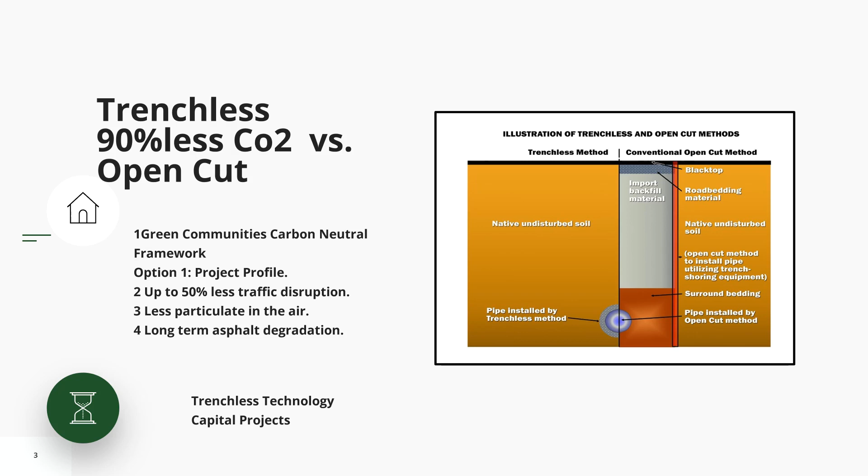Today we're going to talk about both rehabilitation and new construction methodologies available through trenchless technologies. I'm going to look first at rehabilitation, because that's mostly what we think about when we look at trenchless technologies.

When we talk about pipe rehabilitation, we've got to step back a second and look at the definition of what a pipe is. What is it there for? What does it do? Well, first of all, it's a vessel to contain a liquid or a gas.

The functionality of that pipe to contain the liquid depends on the liquid that's in it. If it's a storm sewer, it doesn't have to function that well. Obviously, if it's petroleum or natural gas, it has to perform 100% and totally contain the liquid. If it's water, surprisingly, we have allowable waste or allowable leakages in water pipes. But sad to say, a lot of leaks from water pipes are becoming more and more, and some cities are losing 30, 40, 50% of their treated water out through leaking water pipes.

The next issue is its ability to transport that liquid. Is it big enough, in other words? As we densify our neighborhoods, the pipes that we put in 50, 70, 100 years ago are now too small. Therefore, we have to upsize those pipes to make them big enough to transport the liquids now being demanded of them due to the densification of areas.

The last one is the structure of the pipe. It has to maintain a tunnel. If that pipe starts to fail—this is more relevant in culverts than smaller pipes, but smaller pipes do collapse as well—is the structure good? The reason I'm breaking it down this way is that the rehabilitation we're talking about in Trenchless is able to handle any one of these issues, and therefore bring life back into that pipe and give us back 70 or 100 years of lifespan again.

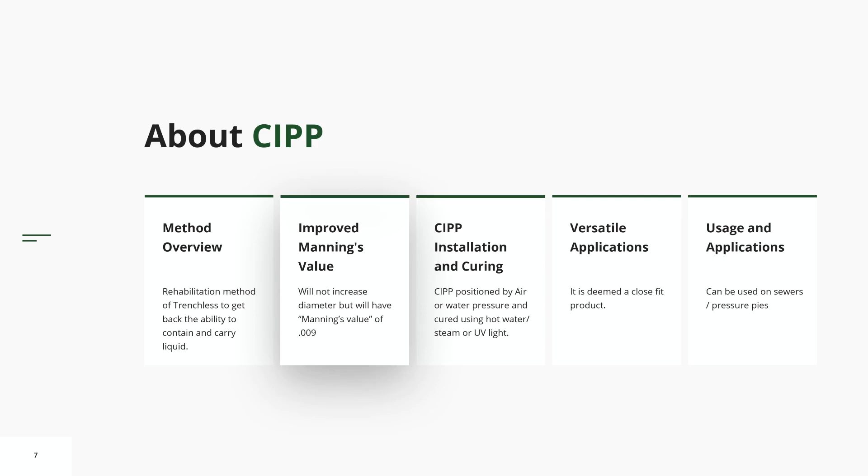Here is what we're doing—we're doing a wetting out process. We've got a roll of felt that is pre-manufactured. It is the diameter required for the particular job, so it might be 200 millimeters, 600 millimeters. In this case here, I would guess it's about 900 millimeters.

We induce a vacuum into that felt with a vacuum pump to create a vacuum. So that felt liner is in a tube, and it's got a coating or a wrap of plastic, like saran wrap type plastic, on the outside of it, so it's sealed. Then by introducing a vacuum on the inside, we've sucked all the air out, and just downstream of that, we introduce resin.

The resin goes into that vacuum and essentially saturates the felt. Or you can use fiberglass, or you can use Kevlar—there's lots of different products you can use to give structural strength. So the resin is introduced, and again, the resin is designed depending on what the product is—if it's sewage, gas, or a chemical you're trying to transport through this pipe, you can change the resins accordingly.

That roller, because you know the strength of the resin you're introducing and the thickness of the felt, what you're doing with that roller is setting the final thickness of the pipe. So if the design comes back and says you need a 25 millimeter pipe, you'd set those rollers at say 53, 55 millimeters apart, which gives you your double 25 by 2 plus 2 or 3 millimeters for safety.

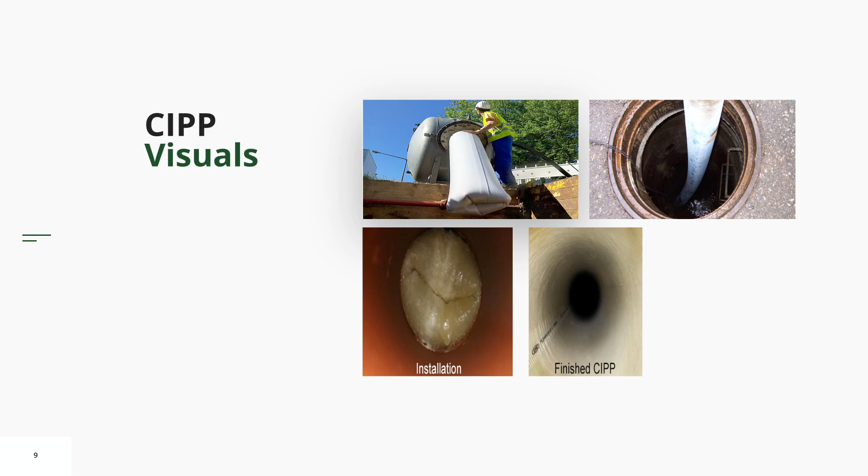Here is your typical finished product, just doing a cross-section through it. So the pipe on the outside in white is the existing PVC pipe, and then you've got your CIPP pipe on the inside. Again, you see that joint of the plastic on the right-hand side here at about 5 o'clock, that little white line going through there. That's the plastic on the inside again.

So here's your typical resin or CIPP pipe and a CIPP pipe totally rehabilitated.

Here's another product, this is a spray-on. So the CIPP pipe we talked about a few minutes ago can be designed either as a standalone, or as a composite product. In other words, if you're looking at a pipe, say 600 millimeters or 900 millimeters, you don't really want to put a CIPP pipe in there that is so thick that it displaces the existing pipe completely. There's no need for that, unless the existing pipe is totally gone.

What you would do is put in a composite product so that your CIPP will augment the strength of the existing pipe, or if it was just a case that the existing pipe was leaking, you put in the CIPP pipe to stop the leaks, but you're depending on the existing pipe for the structure. In this case here, there is really no structure from this product.

It is a polyurea that you're putting in here, a coating that is going on. It does have the ability to span holes and span leaks in the pipe. And what it's doing is providing the ability for the pipe to now hold water again.

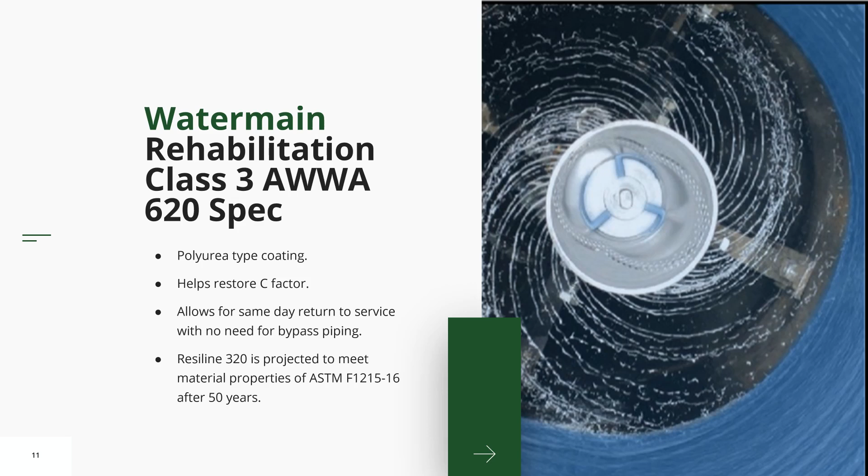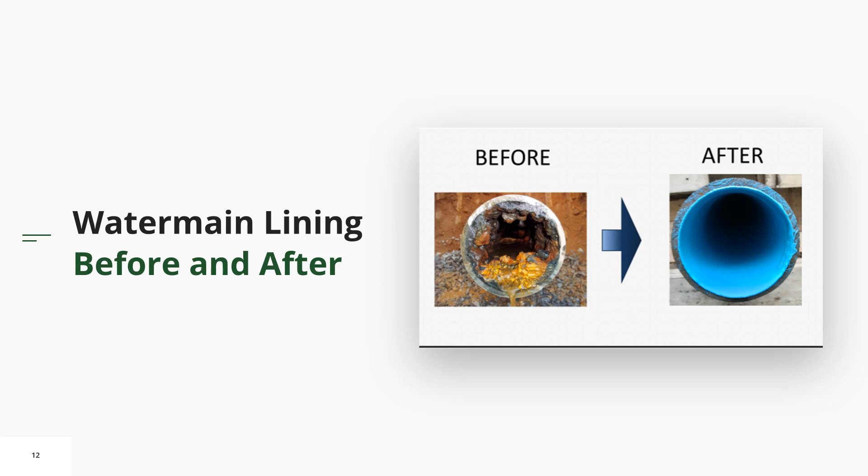On the right hand side, you've cleaned the pipe and then put the polyurea on the inside. So that's the pipe on the right hand side. You can see the increase in capacity and the longevity, and you've sealed any holes that are in the pipe. Now out of water pipes, down into a corrugated steel structure culvert.

So we're talking now about a much bigger pipe. This was a pipe in the city of Richmond, just under Highway 99, which becomes the I-5 in the US. This pipe had failed on the right-hand side, and this is what's called an exit control culvert, which means there is standing water in the pipe all the time.

Therefore, the invert of the pipe in this case is probably in pristine condition. The overt of the pipe, as you can see at the top of the photograph, is in great shape. So it's just at that band area on the sides, typically 8 and 4 or 9 and 3, that has failed. In this case, within 150 to 200 millimeters above and below that failure band, the pipe was a full 6 millimeters in thickness. But at that band, it had failed the whole way along.

I'm not sure exactly why. It's probably to do with water and oxygen levels.

Here is an entrance control culvert. An entrance control culvert is one where the water goes through and doesn't remain standing in the pipe. It just flows right through, and you tend to get bed loads and rocks. Exit control culverts tend to be flat and sloped, whereas entrance control culverts tend to be steep. Entrance control culverts tend to have bed loads, rocks and gravels coming through them, which corrode the invert through abrasion. Here you can see the abrasion happening, and then it goes through.

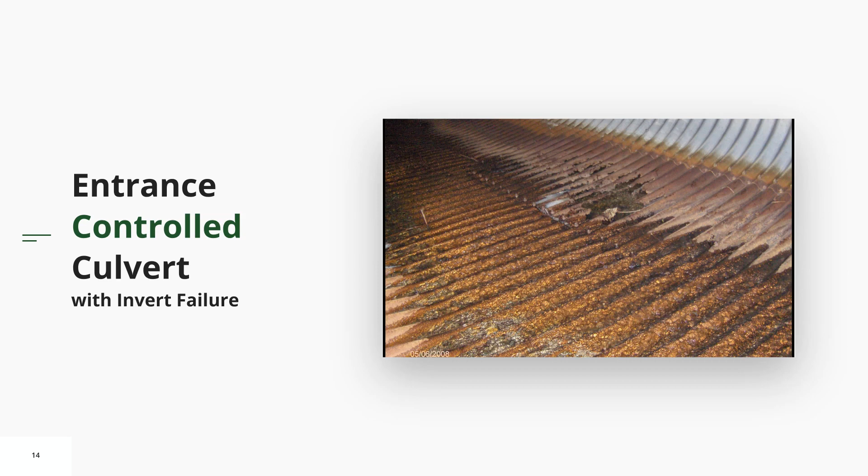Here is a product that is great for rehabilitating these pipes. It's a sprayed-on, centrifugally applied product. Whether you're putting on a geopolymer or a cementitious product, it doesn't matter what the product is - that's a design issue. It's the application that matters here, and this is put on with a spinning head, either electrically or air-powered.

Here's a more conventional approach. This is when the pipe has failed, generally down at the 8 and 4 or 9 and 3 position. So what we're doing is bonding to the existing pipe, making a composite product. The bottom becomes a continuous concrete pipe without joints, bonded to the steel. Then the steel on the overt, or roof of the pipe, being in perfect condition, is reutilized to continue providing service for a further 70 or 80 years.

This is a key part of rehabilitation. We're using the existing structure, the parts that are still in good shape, and augmenting that existing structure with the part that has failed, building a new section to replace the failed part.

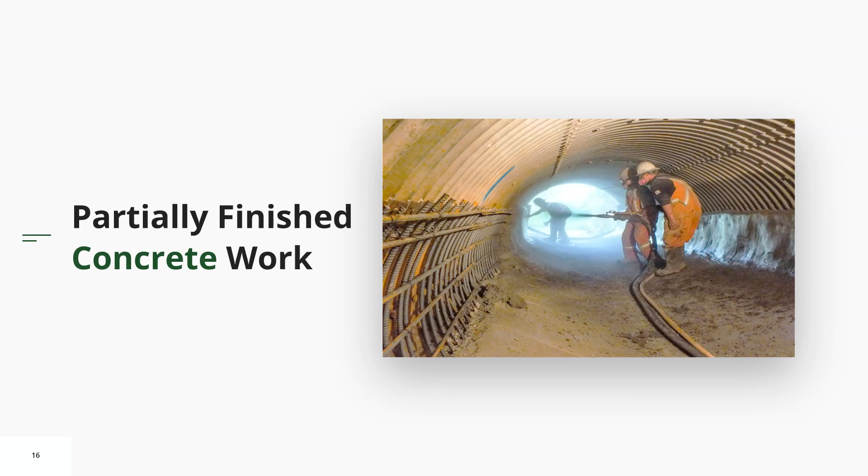In this case, we're concreting the floor and shotcreting the walls. All of those previous products I talked about were what we call closed fit liners. They were very close to the edge. They maybe augmented the flows a little because of the N value or C value, but they didn't make it bigger. They made it the same size or as close to the same size as possible.

Now we talk about slip lining or loose fit liners, or internal rehabilitation. It can be used again in pressure pipes or sewer pipes. You do lose diameter, that's one of the issues here. What you're doing is putting a pipe inside a pipe, so you've got an annulus between the new pipe and the old pipe.

That annulus generally has to be grouted. Doesn't always - in water mains you don't have to grout. The Europeans don't tend to grout, North Americans do. So there's different opinions as to whether to grout or not.

Pipes can be introduced by various methods. It can be pull-in whole, or folded down or collapsed in some way.

The other big issue here is that this pipe we're putting in is made by others. So it takes part of the responsibility from the engineer of record away, because all of the other processes we talked about - whether the concrete, the CIPP, the resins - were all made, or the process happened, in the pipe on site, which meant you were both rehabilitating the work and creating the product on site. From now on, with slip lining, the product you're doing the work with is made by others, controlled inside the factory, not on site.

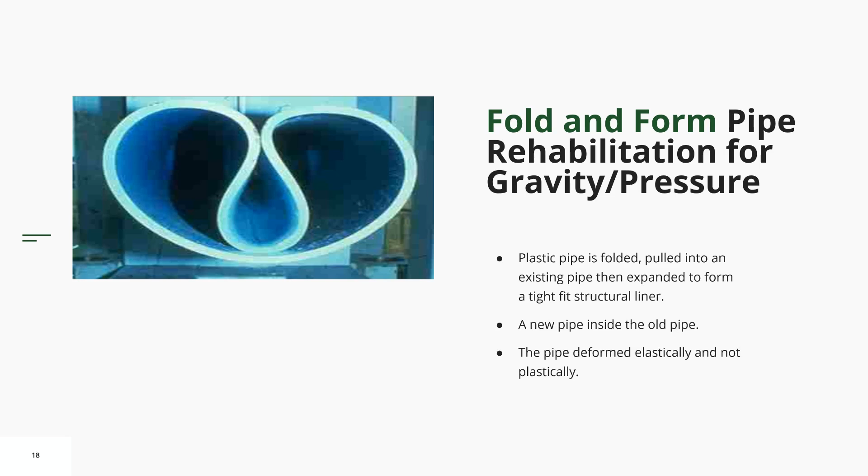So if you remember way back to my carbon slide, I talked about that pipe way down in the ground, 2.5 meters down. What we're doing is just rehabilitating that pipe inside. So all of the other material I had to excavate, at 2.5 meters deep by 1.5 meters wide, with all these rehabilitation methodologies we're eliminating that action - eliminating hauling all that material away. All we're doing is working within the existing pipe.

There is another process you can do where you can swage line. You can actually pull high-density polyethylene, because it has a great ability to elastically deform before it yields. So you can elastically deform the pipe, stretch it out in other words, taking the diameter down by 10, 15, 20%, pull it into the host pipe, and then let it spring back, if you like. Now, it doesn't spring back as such.

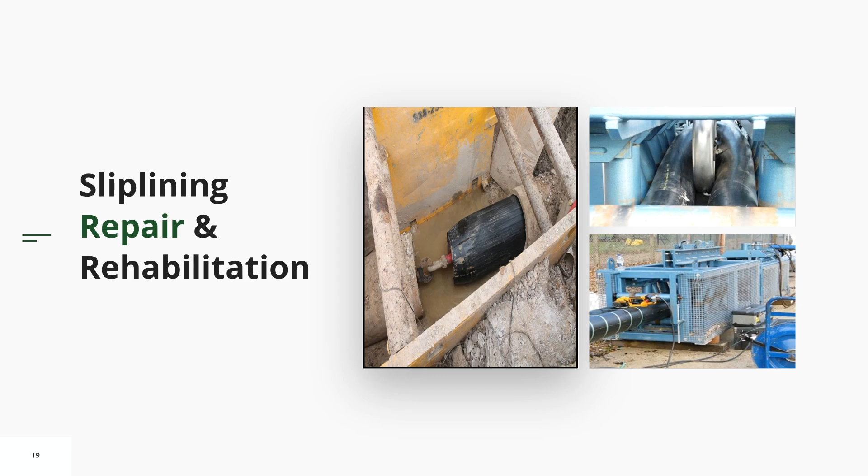Here's another product, this one called Primus Line. It's a product out of Germany, and it came from the oil and gas industry, because the oil and gas industry is famous for having to put water down into oil wells to push the oil back up again.

A lot of these pipes would have been steel pipes, used for 10 or 15 years, in the North Sea, in the Gulf of Mexico. It wasn't a big concern at first that there were steel pipes and coatings on them. Then they found they were using the pipes longer and longer, and they were starting to get failures and corrosion. So they were looking for ways of rehabilitating it. This was one of the ways.

The other option was swage lining, using high-density polyethylene liners. Again, the steel pipe was failing due to corrosion, pitting, and pinholes. Structurally it was fine, but it couldn't contain the liquid anymore. So what you had to do was augment its ability to contain a liquid.

Here was one solution, a Primus Line pipe. The blue on the outside is a sacrificial layer, so that when you're pulling it through the steel, that blue will scratch and be scratched to save the other coatings underneath. The beige material is actually Kevlar, which gives it its strength and hoop strength, and the black inside is the product that actually contains the liquid.

So going back to our first premise, the first issue was the vessel to contain the liquid - the black handles that. The beige is the third area, which contains the pressure. And the size, the diameter, is the capacity, which is issue two.

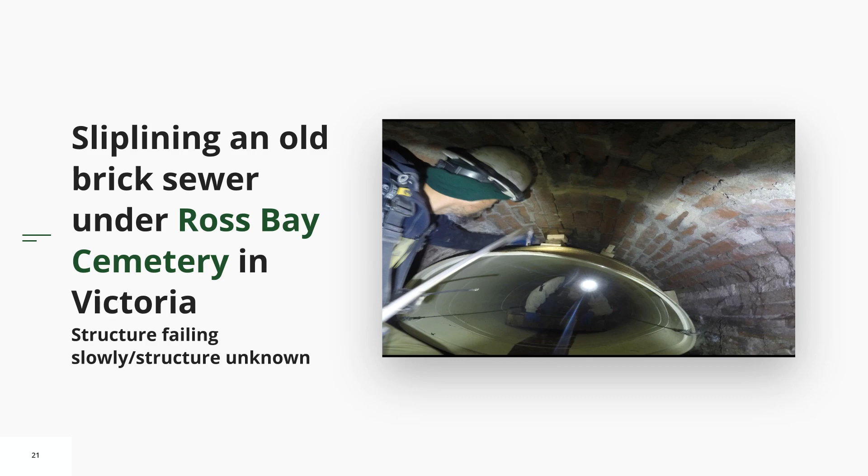Here is another pipe. The previous one I talked about had an invert that was abrading away. This one is a wood stave pipe, located in North Vancouver.

So what we ended up doing is slip lining, again with a GRP product, and stabilizing that ovality by grouting it, creating the structure that way.

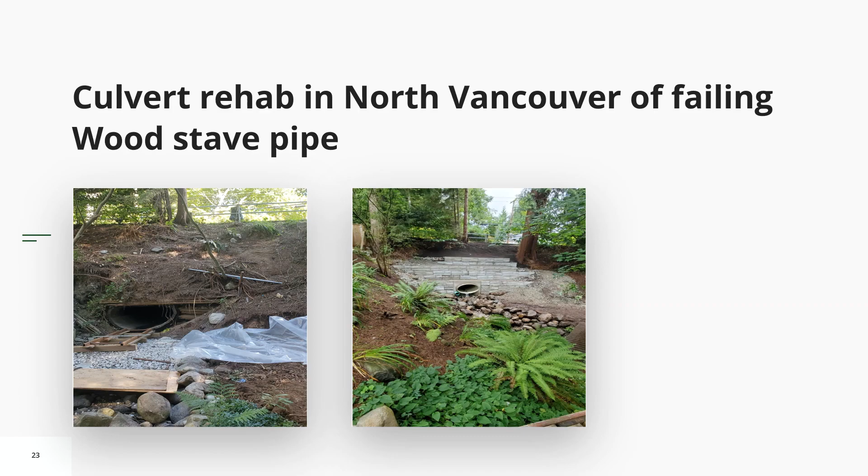Here is a case of a live flow slip line. In the early 70s, late 60s in British Columbia, a lot of sewers were installed to pick up what would have been local sewer systems that drained areas and went out into rivers or oceans.

The major governments at the time deemed that they pick up all of these sewer lines, capture them, and take them into major treatment plants. A lot of these pipes were put in during the 50s, 60s, 70s, and are now coming to the end of their lives, or there are other issues happening too.

A lot of hydrogen sulfide. Because they were big pipes—1.5 meter, 2 meter pipes, 3 meter box culverts—they were concrete, of course.

We now know that concrete has issues with hydrogen sulfide. The hydrogen sulfide tends to eat the concrete, and we get failure of the pipe and corrosion, especially when there's a gap between the top of the sewage and the overt of the pipe, producing the gas. So we get failures in these pipes.

When you go in to rehabilitate an existing sewer line, we can't get 300,000 people to stop using the bathroom for 3 or 4 days. So we have to either bypass or work in the live flows. Bypassing a sewer system is a very, very expensive and very high risk problem.

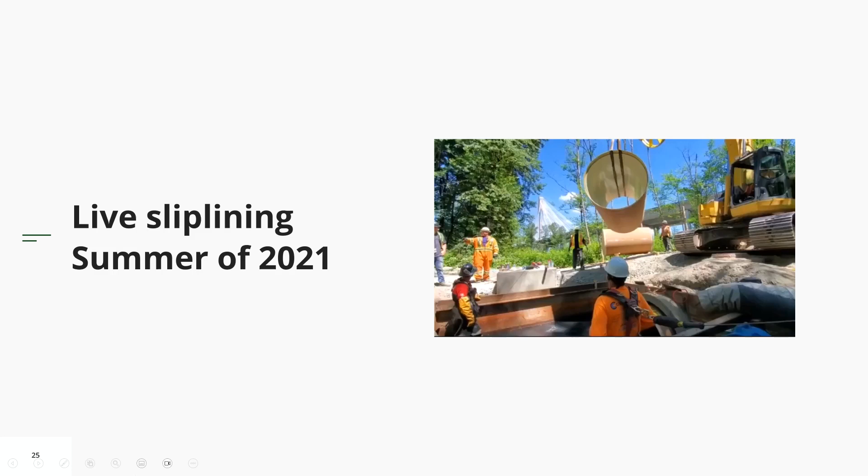Here is a case of slip lining a corrugated steel pipe in Delta. This corrugated steel pipe has failed. Rather than putting in a pipe or rehabilitation with sprayed-on concrete like we did earlier, we're putting in a whole corrugated steel pipe and grouting the annulus.

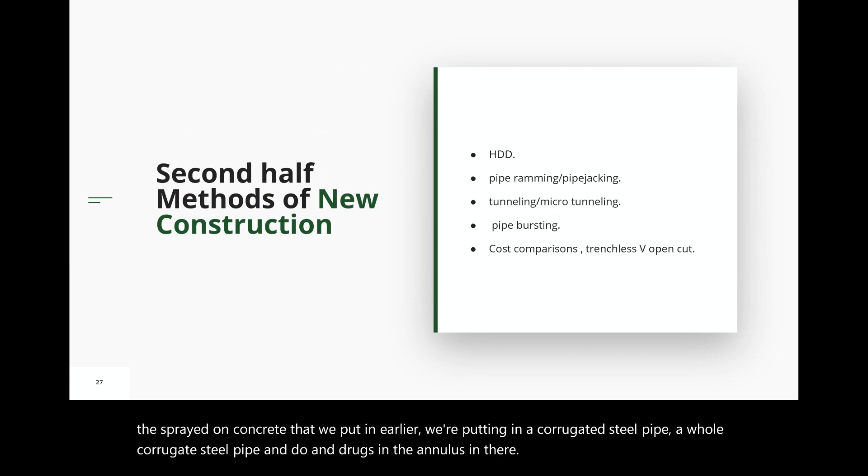Okay, we're going to move on to the second half. The second half is new construction. Rather than the rehabilitation we just dealt with, we're going to deal with new construction, covering the following topics, which I'll get into in detail in a second.

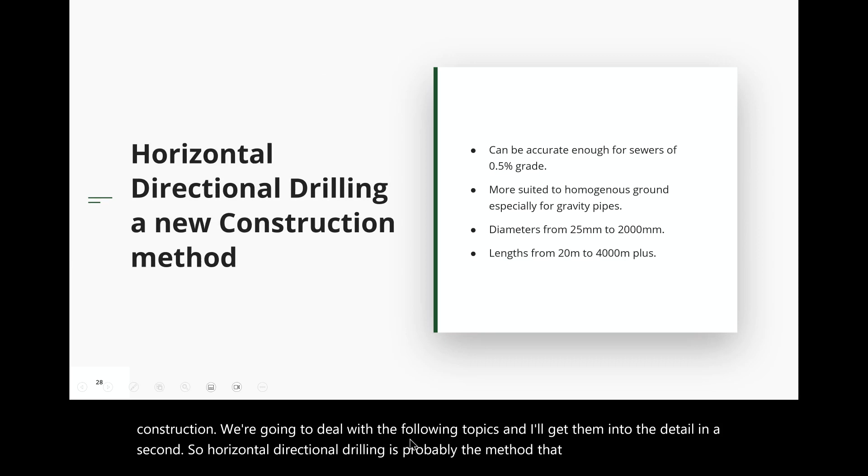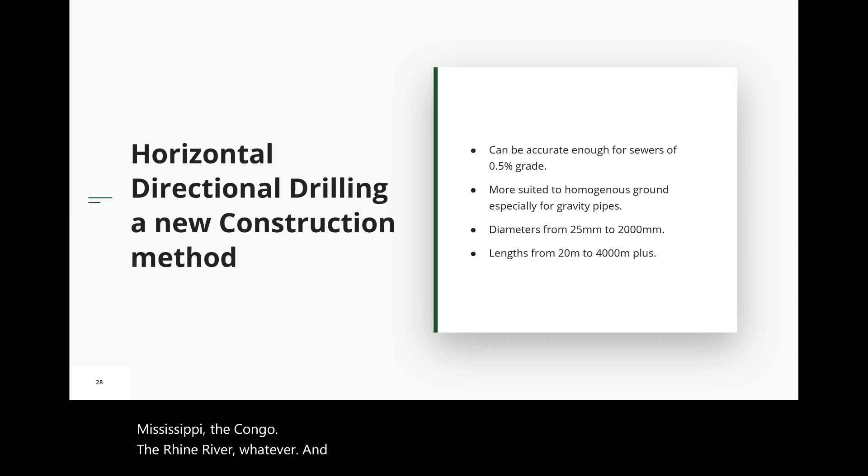Horizontal directional drilling is probably the method we most know about when we talk about new construction. We've seen it used for everything from a 25 millimeter water service or fiber optic cable into your house, to installing 600, 800 millimeter pipe across the Fraser River, Mississippi, the Congo, Rhine River, whatever. It's a process used for installing a pipe that is generally not a gravity pipe - it can be used for gravity if you have very tight grade controls, but it's generally for pressure pipe situations, with lengths up to 4, 5, 6 kilometers depending on what you want to do.

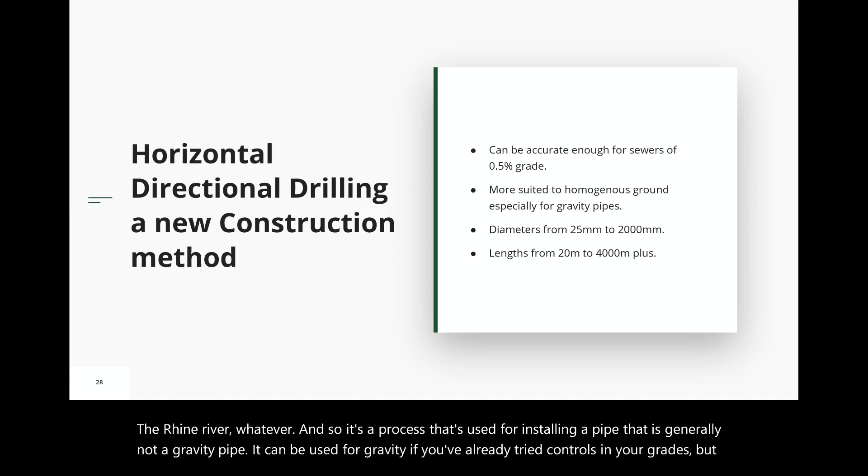This is the process: you are drilling in with a drill rod, and depending on the size of the rig you're using, the drill rod might be anywhere from 25 millimeters in diameter up to 200 millimeters in diameter, similar to the drill rod used in oil well drilling.

Horizontal directional drilling actually came from the oil fields. The rig would go down into the zone where the drill pipe is, then go off laterally to try to reach a reservoir of oil that could be half a mile or a mile or two away - it wouldn't have paid to locate a rig directly over that deposit, but it did pay to drill horizontally from one base. This was particularly common in the North Sea, where you weren't dealing with a rig on dry land but out in the ocean, and relocating a rig there is very costly. So they used this process to capture pockets of oil around where a rig was located.

So then we've used it - it's come into the municipal and utility side. I believe Cherrington was one of the first to get into this in California back in the 60s.

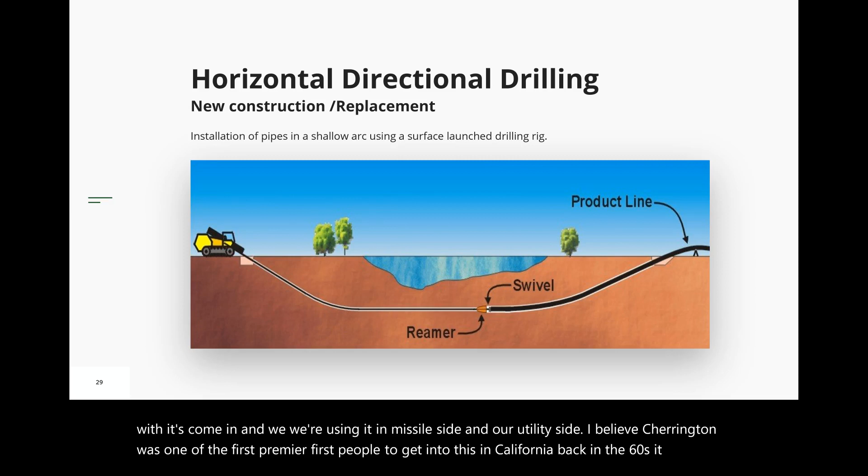It is a process where you're drilling down. As you go straight, you're rotating the rods at, let's say, 40 to 50 RPM. When you want to stop and change direction, you stop the rod in the 12 o'clock position and push straight - that will cause the rod to go up, or in the case of changing from an incline, to go flat. The front of the rod has either a flat plate on it if it's soft material, or a tricone bit on the front if it's rock.

That plate or tricone bit is bent from the direction of the rod by 5, 6, or 7 degrees. Inside that first section, about a meter and a half behind the tricone bit or flat plate, is a sonde which sends information back up to the operator of the rig - rotation, so they know if it's at 12 o'clock, 3 o'clock, or 6 o'clock, inclination to know how inclined the head is, depth, and other parameters such as temperatures of the drill rig and the head. That's how they control it.

So they can either walk over it, or put a wire grid on there - depending on the size and the process, they can control where the rod is, what its inclination is, what its rotation is, and from that steer the rod into the perfect condition. When you're doing this process, it's akin to drilling a piece of steel.

You start off with your pilot hole, and then you verify the pilot hole is exactly where you want it to be. Then you put on what they call a reamer, or if you're drilling a piece of steel, you use bigger and bigger bits. So you ream the hole out.

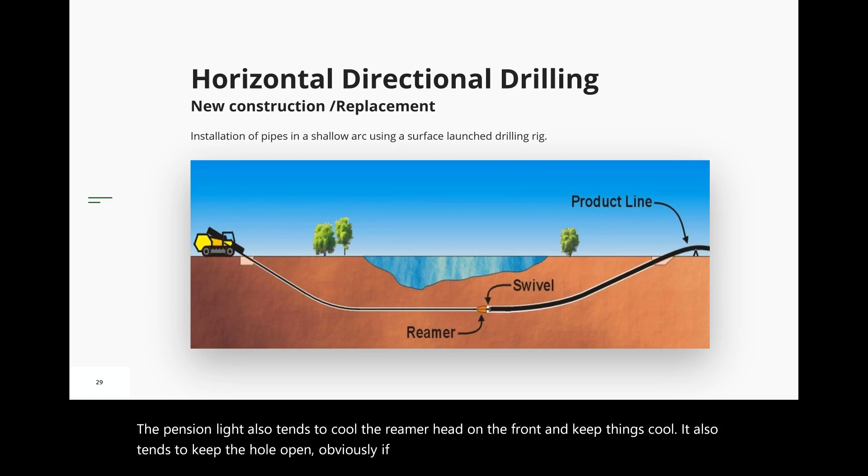What you're doing is balancing the weight of the bentonite with the tendency for the hole to collapse. So you make the bentonite as thick as you need to counteract the tendency for the clays or sands, or even sands and gravels, to try and collapse.

As you start to get into gravels, it becomes very difficult to counteract the ability of gravels to collapse, because of the point load of a piece of gravel — it will just sink through the bentonite.

So once we get into gravels, we end up having to put casing pipes in to get through the gravels and into the rock to drill through.

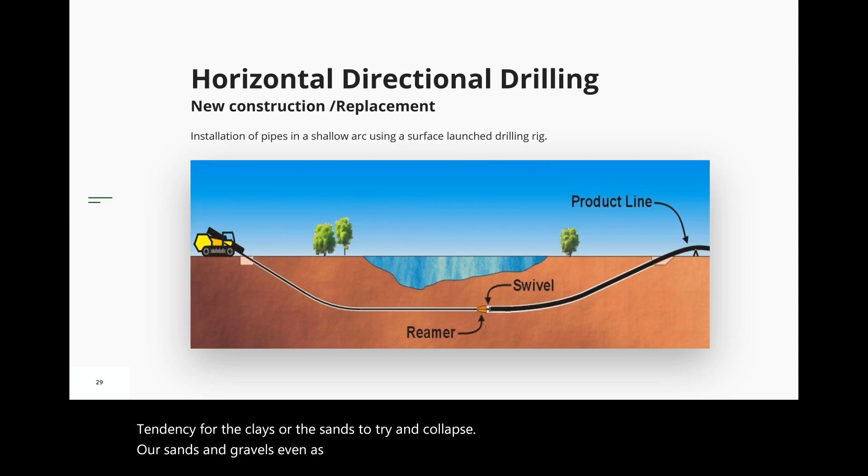But I don't want to get into too many details on that. I'm showing you this hole because of this path here, since it's important that we understand the process of directional drilling.

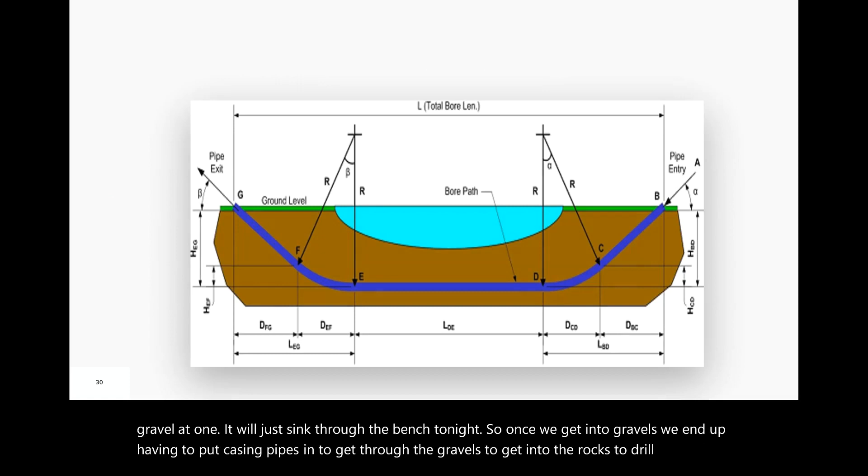In this case, I'm using this as a path for putting in, say, a pressure pipe like a water pipe or an oil pipeline, under a creek.

If, however, I was using directional drilling to create a gravity pipe, the only piece of pipe that's usable for gravity is really from E to D. The rest of the pipe is just put in as part of the process of getting there. But I need to do from G to E and from D to B — those two pieces need to happen.

If they don't happen, I can't install the pipe from E to D. Therefore, I need a lead-in area and a lead-out area. That's one of the issues with directional drilling, because it starts from the surface, goes down, gets on line and grade, you drill along on line and grade, then you start coming back out again.

If you think of the drill rod going through the soil, it's akin to a wire that's used for cutting cheese, right?

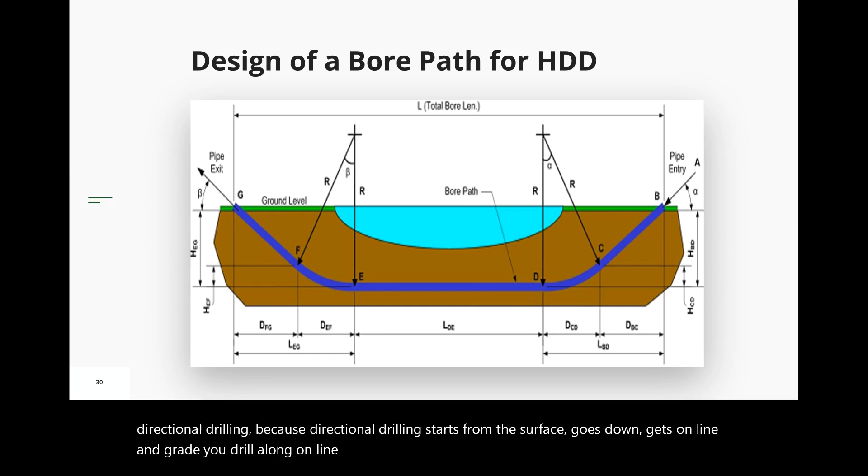As you pull that rod back and forth, the tendency is for E and D to start coming up through the ground, because the rod is under tension as it's being pulled either in or out.

So you end up having to move the E and D spots far enough away from the section you want to use, so you don't end up pulling up. That means you do have a long lead-in area and a long lead-out area at the end of a used section of pipe.

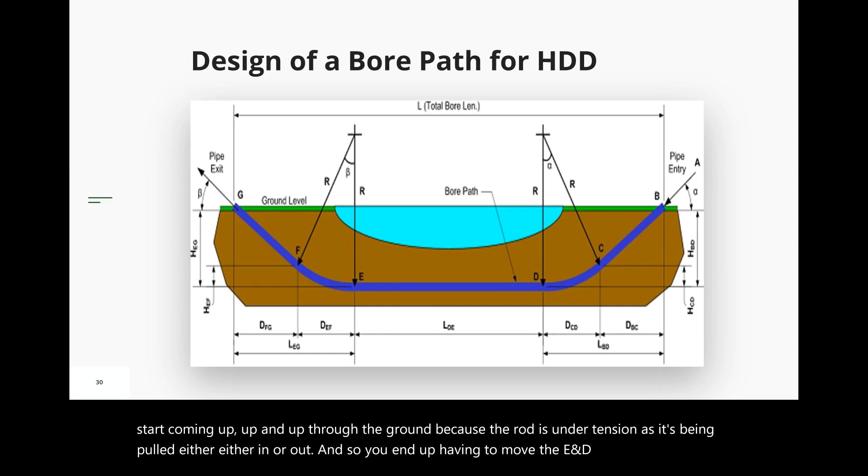I'm using this from Ditch Witch — their directional drill — to explain how the directional drilling system works. It'll go through exactly what I talked about a few seconds ago in the previous slides.

So you're establishing the bore path. It's very important that you know exactly what utilities are in the way, and you generally will pothole those depending on the risk of those utilities.

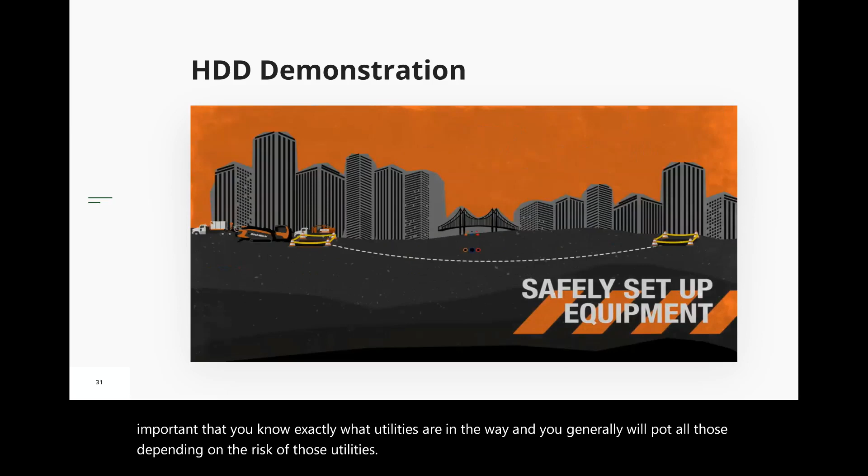So they're drilling. You can see the drill rod is rotating, and that steel plate is on the front of it. Now they're going under the existing utilities there. You see that machine there that they showed us, the sonde is sending up the signal. It's stopping at 12 o'clock. He's going to push straight, and then he pushed straight, and that caused him to go up again.

So he's going along. Here they're talking about the mixing fluids. So that's the mixing fluid coming out at the front. That's the bentonite. It is mixing with the material, and it's going back and bringing the cuttings back. So they're using vacuum excavation here to expose utilities. Here it's getting to the end.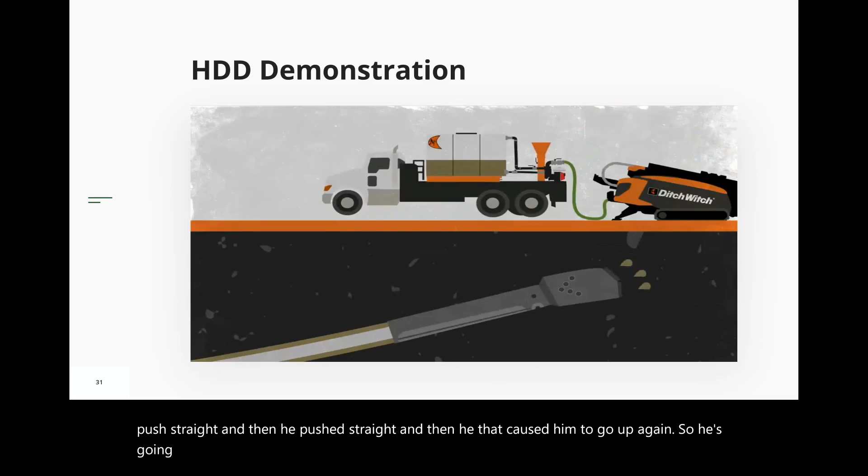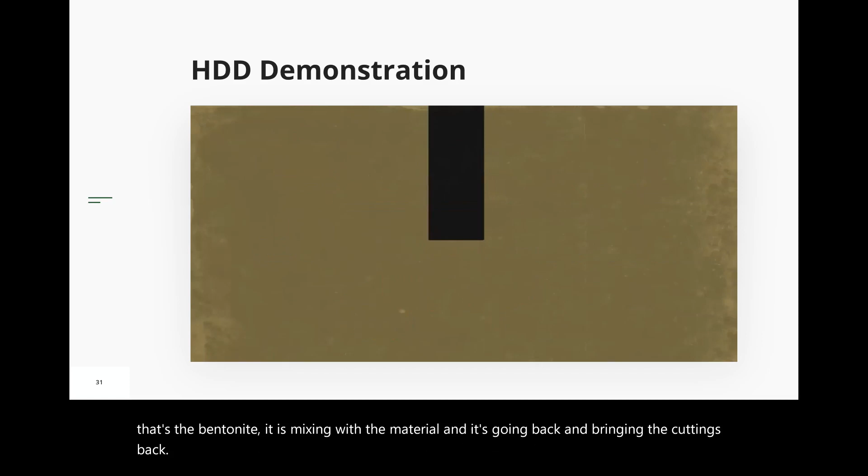So we've made the pilot hole in this case. Now what we're going to do is take off that drill piece on the end, and they're going to put a reamer on there. Here's your reamer going through, and it's increasing the size of the hole. Hopefully you'll increase it in steps and take it up to the final diameter that you need to do. Again, you're using bentonite in here to take the cuttings back.

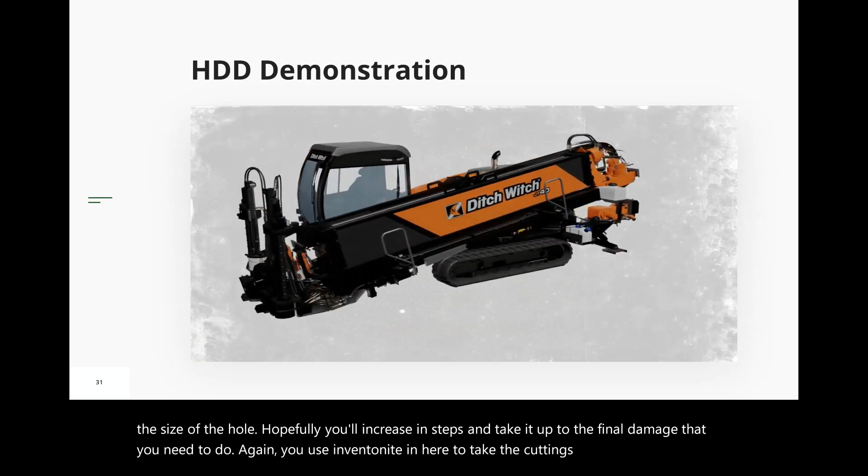Pipe ramming, pipe jacking, as we demonstrated in horizontal directional drilling, you need to lead in and lead out. Pipe ramming, pipe jacking, you start from a pit and you end in a pit. Or you may be pipe jacking, pipe ramming under a railway line or under a road which is built up on a flat plain area.

Diameters up to 300, from 300 millimeters to 3.5 meters, 4 meters. You're generally not going to get 300 millimeters. So one of the problems you get with pipe jacking, pipe ramming is that you may have to go into the pipe if there's something in the way, such as a rock or a tree, and obviously you can't get into a 300 millimeter pipe. The smallest you would get into would be maybe 450, but probably more 600 millimeter pipe. So therefore, pipe ramming, pipe jacking, you tend to put in at least a 600 millimeter pipe.

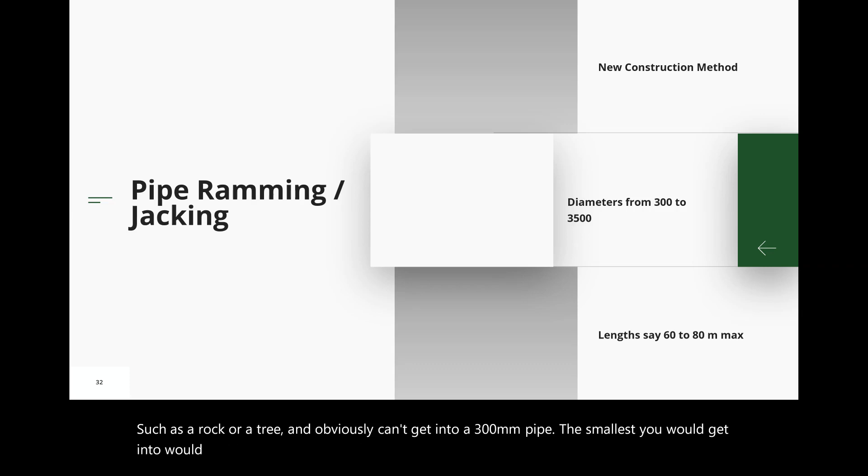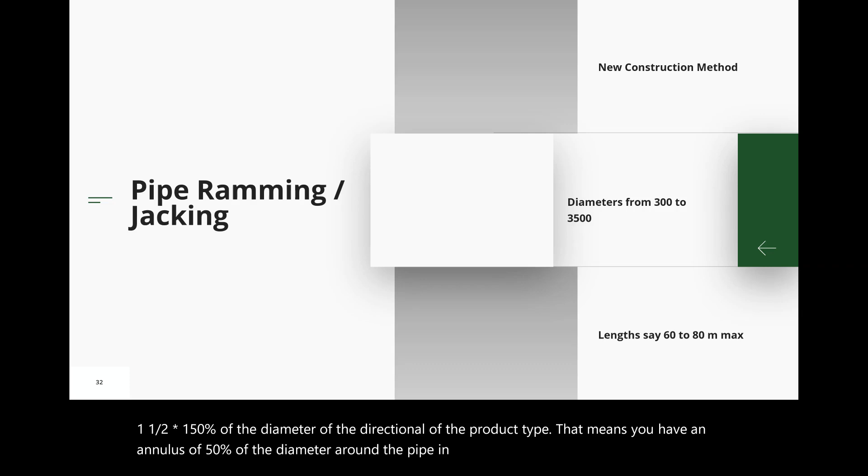When we talked about directional drilling a few seconds ago, we talked about making the hole 1.5 times, or 150%, of the diameter of the product pipe. That means you have an annulus of 50% of the diameter around the pipe. In all other methods of construction, you're only making a hole probably 25 to 30, 40 millimeters bigger than the outside diameter. That does tend to limit how far you can go, because your friction builds up depending on the soil, obviously, but 60, 80, 100, 120 meters, that's the limit. Whereas in directional drilling, you can go 4 or 5 kilometers if you need to.

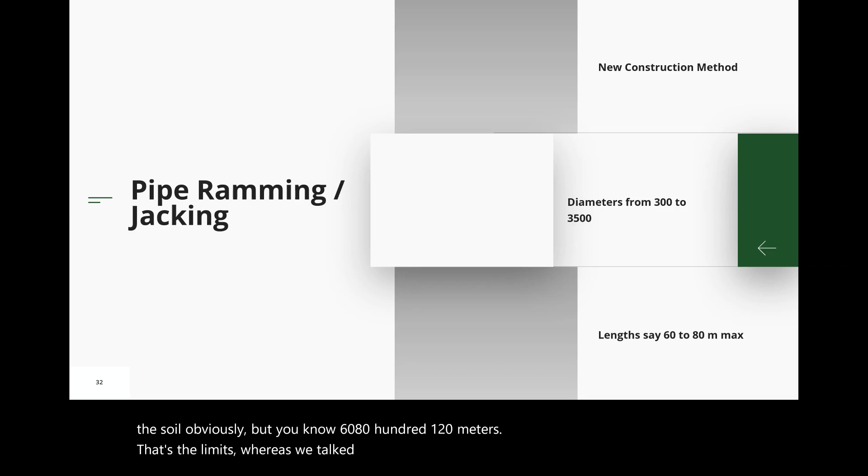Here's your pipe ramming. They have an air tool on the back, and they're hammering this casing through a road. You can see in this case they put a pit in here. Now by pipe ramming, I do not need a back wall because the energy I'm using to hammer the casing through, I'm essentially doing a horizontal pile driving.

That casing is being hammered into the ground, and it has a little bit of extra pipe welded on the front leading edge to make the annulus a bit bigger than the outside diameter of this. I will also introduce bentonite around that casing pipe to try and lower my friction, and also to keep the existing ground in place, and create a little zone of low friction area to allow my casing pipe to advance as far as possible. And as I ram in, of course, I'm building up weight on the inside because I'm encapsulating the material that was there in the ground originally inside the pipe.

I will get to the point where my weight has come up because of that material. So I may stop, take off the hammers, take the whole thing apart, go in, clean out the material that's inside the casing pipe, reattach the hammers, and start going again.

This is pipe jacking. Pipe jacking and micro tunneling are not that different. The only difference is the machine that's on the front end of this process. Pipe jacking would be an older process. You would have had people inside at the front end, tunneling by hand, just as they tunneled if you went way back to that brick sewer line we talked about in Victoria, where they did the tunneling by hand. In this case, they used to do tunneling by this as well. Now we tend to use a TBM, or a micro tunneling machine, or a tunnel boring machine of some kind.

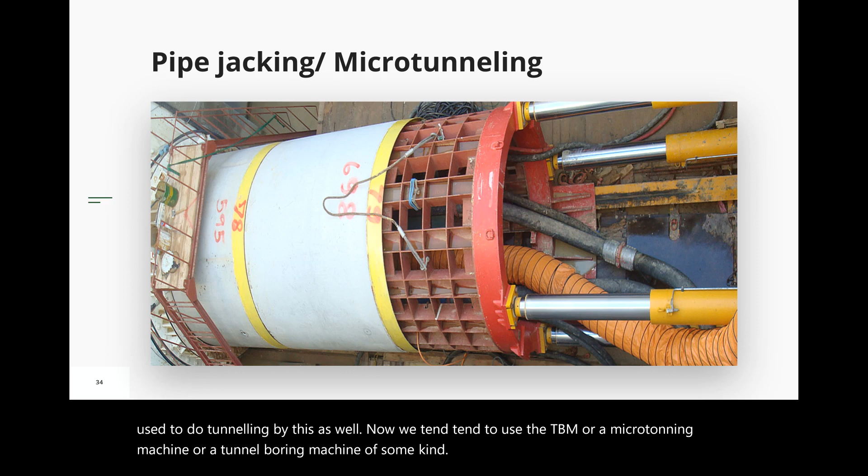In this case, we're pushing the pipe from the back. Because of that, the annulus is only 25 to 50 millimeters on the outside of those pipes. You do tend to limit out after 60, 80, 100 meters, so micro tunneling and pipe jacking are limited to those kinds of lengths before they start to slow down. Obviously, you can make the annulus a little bit bigger and continue on more, but it depends on the soil types and lots of other things.

Pipe ramming versus pipe jacking, why you'd use one against the other: with pipe jacking, I'm jacking against a back wall or a product, using 250, 300, 400, 500 tons, so I need a good back wall to push against. With pipe ramming I don't, because my energy is coming from a pneumatic tool. So they both have their benefits.

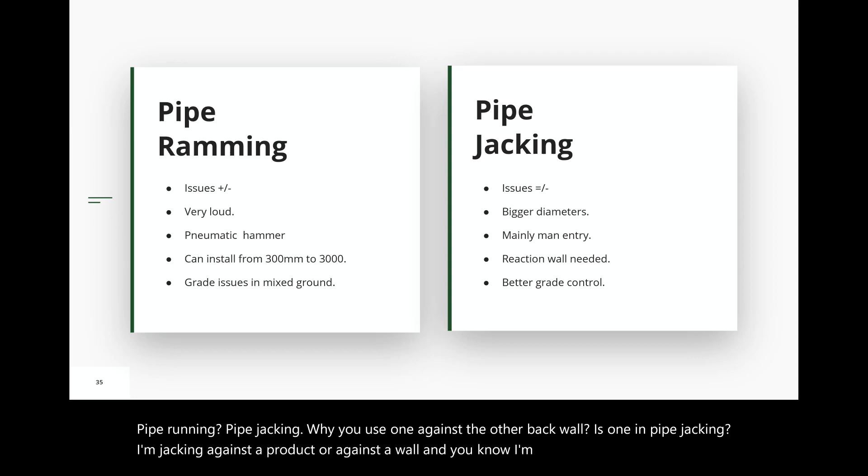A tunnel boring machine or a micro tunneling machine are very similar except for scale. You can see in the front, in the middle, three wheels - that's a tricone bit, the same type of bit we use in directional drilling, except there we just use that bit alone. This is set up to go through rock.

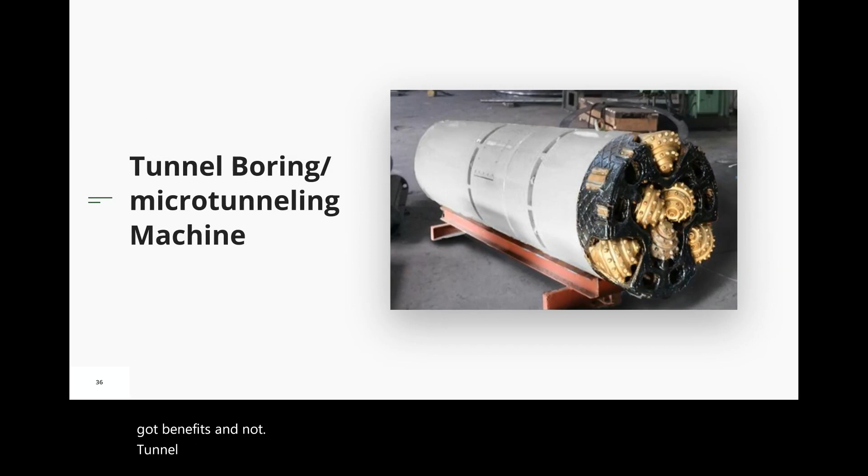Each of those gold-colored wheels rotate and have knobs of very hard material which eat away at the rock. As those wheels chew away, the rock cuttings mix with bentonite - the area in front is bathed in bentonite, which keeps the cutting edges cool and mixes with the cuttings, getting pulled back to the surface and separated out. We use bentonite here, very similar to the directional drilling system.

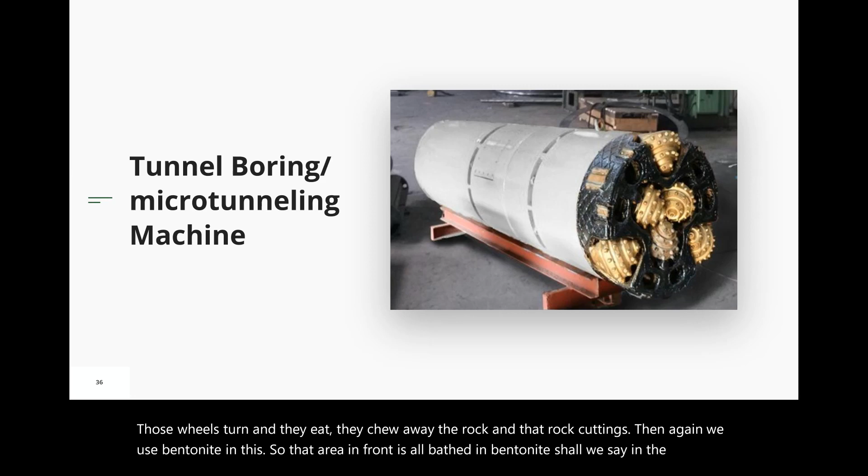We use the same bentonite system in micro tunneling. If you look at the breaks in that machine, in the white colored pipe section, those are actually hinges - there are jacks inside that cause the hinge to move, which allows me to steer, both vertically and horizontally. I would have lined up this machine from the very back with lasers, and I can steer it from there.

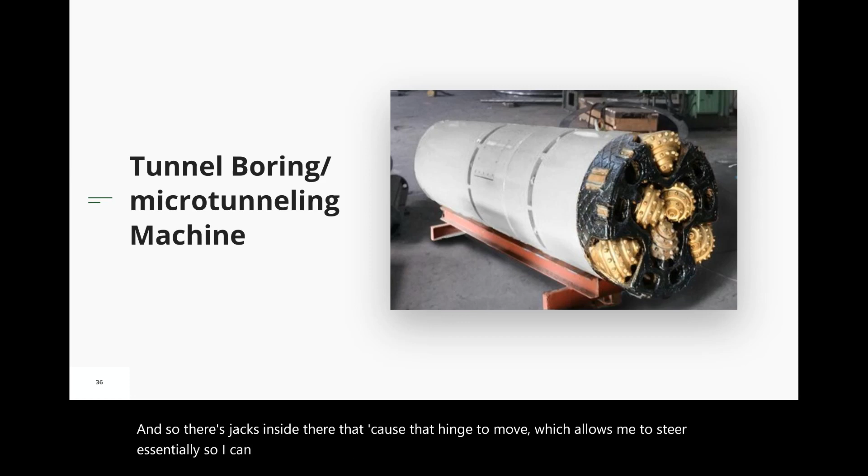I'm shipping bentonite from the very back up to the front, out into the cutting edge, mixing with the cuttings coming off the rock as those wheels chip away constantly. Those cuttings tend to flow to the bottom - you can see holes on the bottom there. The cuttings get absorbed or flow in through those holes because it's pressurized, and they're pulled back up to the starting process and put through cleaners to take the cuttings out.

Here's a large tunnel boring machine. We just talked about the micro tunneling machine and pipe jacking, which is limited to 80, 90, 100 meters because we're pushing the pipe from the back. Now with a tunnel boring machine, we do not push the pipe from the back - once the pipe is put in place, it is not moved anymore.

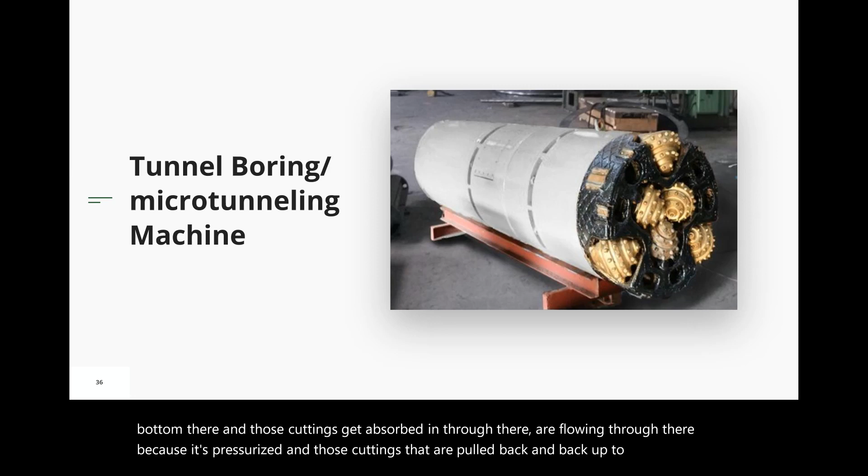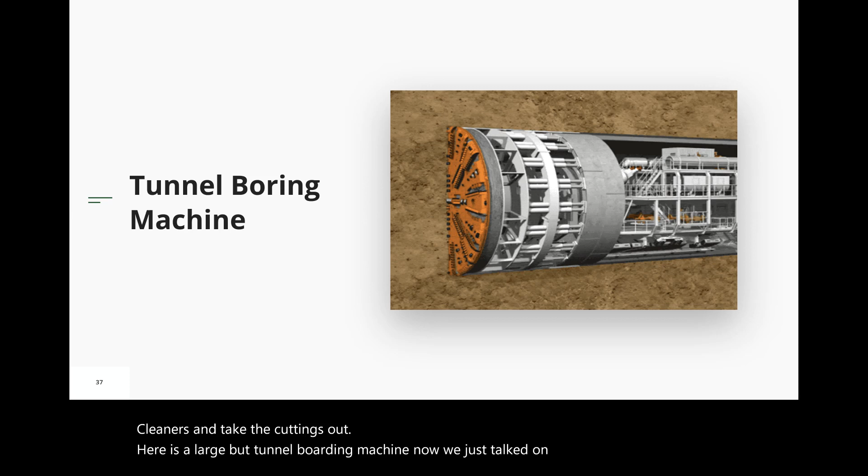What you're looking at are segments of pipe - if you look at the right of that machine, this machine is probably 2-3 stories high. You can try to spot a human being in there for scale, but it's probably about 5 or 6 human beings high. This could be a channel tunnel, or a tunnel through London for the Tube, or through Vancouver for the SkyTrain. These are big, tall machines, and the pipe segments come in pieces.

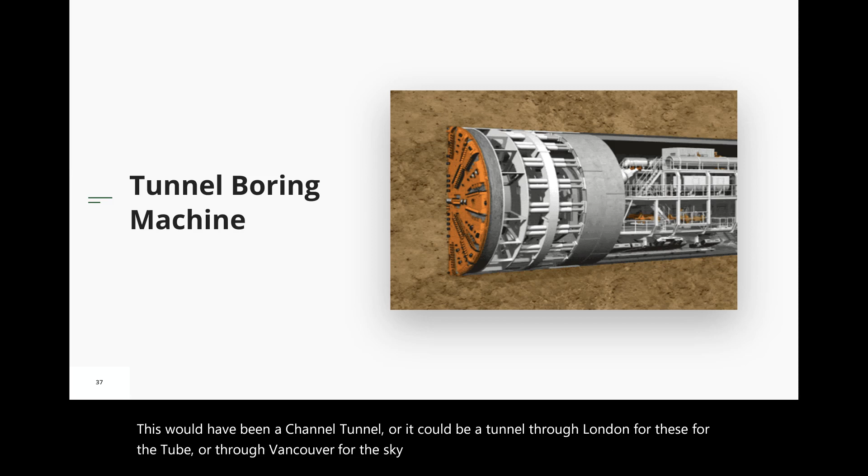They don't come in a whole circular pipe like in microtunneling - they come in segments, which you can see on the top and side as they're put together. The segments are put in place, and the machine actually pushes off those segments to go again, continuing that way. Once the segments are put in place, they don't move anymore, so the only friction is between those segments and the front end of the cutting machine. That friction is very, very low, which means there's really no limit to the distance you can go.

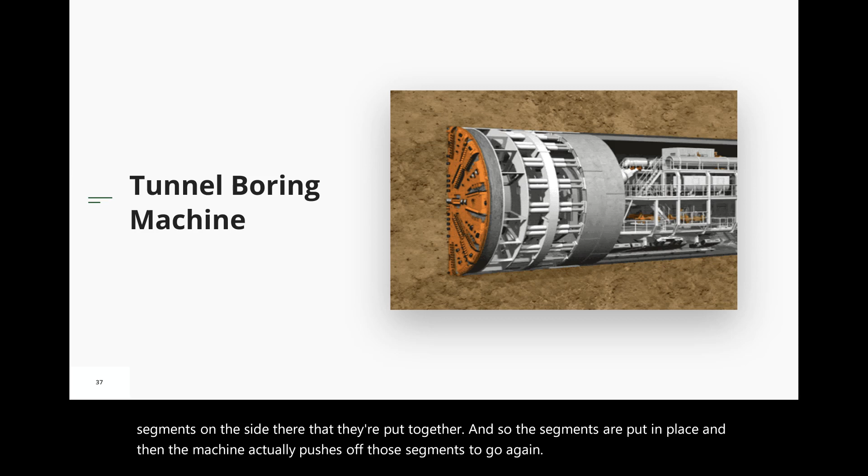We go back to the 1860s. This is how they would have installed the slip lining of the brick sewer line in Victoria that we talked about.

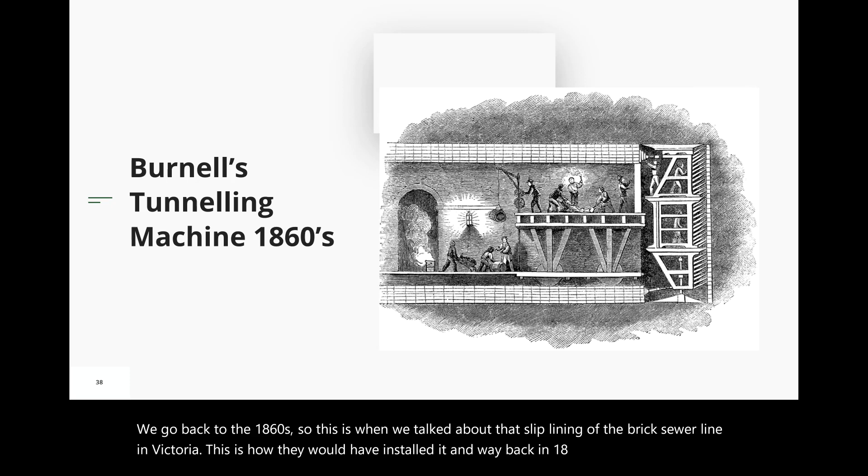Way back in 1860, this was Brunel's tunneling machine from the 1860s going under the Thames in London, putting in the tube. At the front face they're digging, putting materials in, and building the brick sewer line as they progress. You can see the jacks from that cutting edge pushing the front edge, just as I did in the previous slide, pushing the tunneling machine along by pushing against the existing brick pipe.

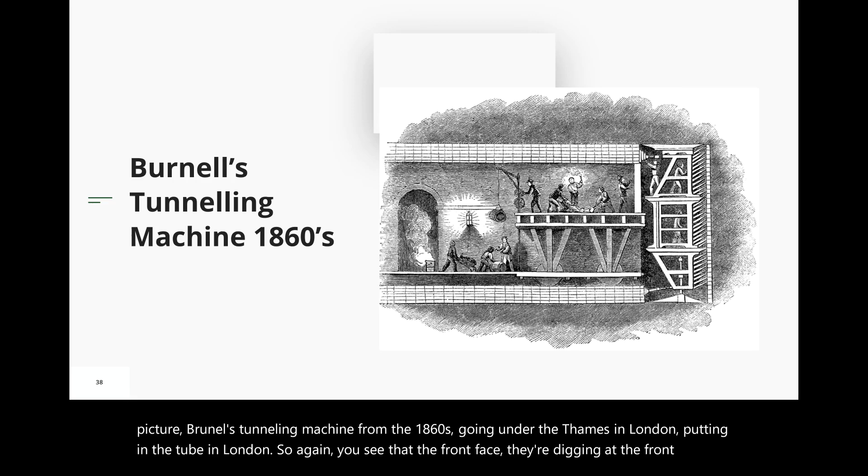Pipe bursting is kind of a hybrid between the two. In pipe bursting, we're utilizing the existing pipe, but just using it as a hole in the ground, a path that we're using to install a brand new pipe into.

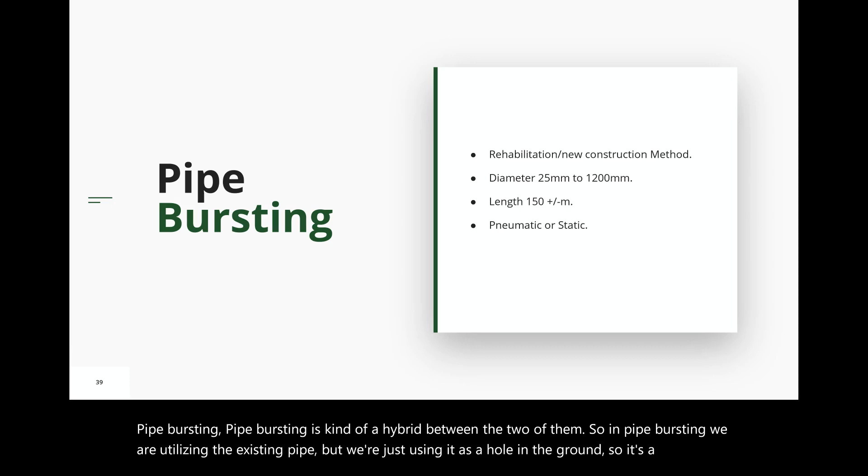It can be either static or pneumatic. Static systems tend to be used in the north half of the US and into Canada, while pneumatics tend to be in the south half. Because the diameter of the hole you make is only 10% bigger than the outside diameter of the pipe, you limit it to about 100 to 150 meters. That's not a big issue, because most of the time pipe bursting is used to replace pipe from manhole to manhole, and that would have been the length anyway.

Diameters can range from your water service for your house, which is 25 millimeters, all the way up to about 1200 millimeters - that's about the biggest you're going to get with pipe bursting. It depends on the ground, depends on conditions, depends on the existing pipe and stuff like that. It is normal to upsize.

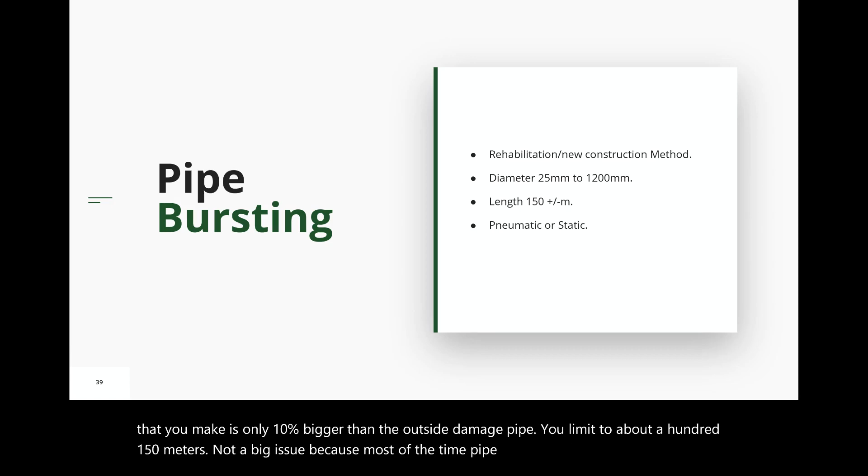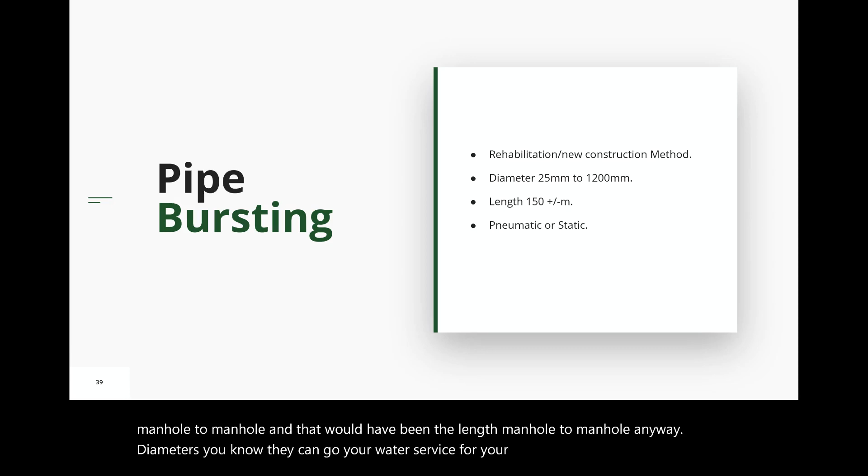When we looked at the criteria for piping, we talked about the vessel to contain the liquid, and then the second parameter was about the ability to handle flows or increase in flows because of densification and so on. This is how you increase the capacity of the pipe when the old pipe doesn't have sufficient capacity and we need to carry more liquid.

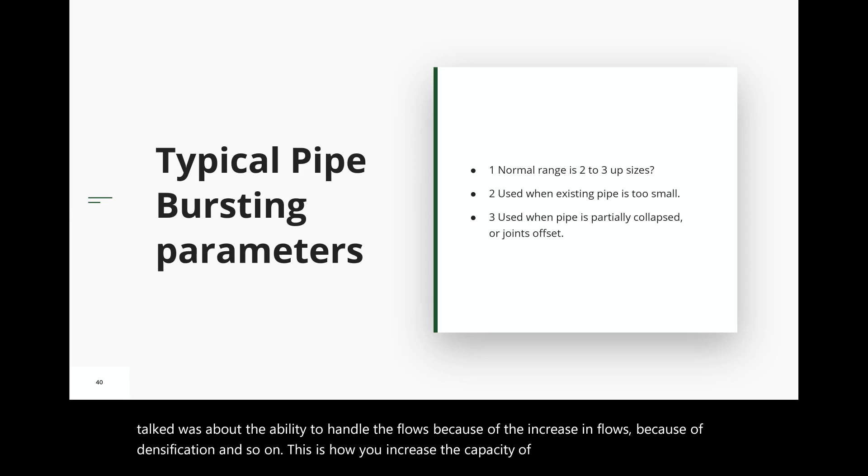Or if your pipe is partially collapsed and you want to replace it and bring in a brand new circular pipe, you can also do that. Here we're using it to replace a steel water main. Steel, because of its ductility - such as PVC, corrugated steel, ductile pipe - all these products have ductility.

What tends to happen is that if you use a pneumatic system, you're hitting against the pipe and the hammer just bounces back, so you don't get anywhere. So you have to use a static system that will pull, split, and pull again. You're using, in this case, a steel water main - you're splitting apart the pipe with almost what looks like a can opener, then putting new pipe in. Because of the ductility of steel, it's not too bad - it will split and move out of the way.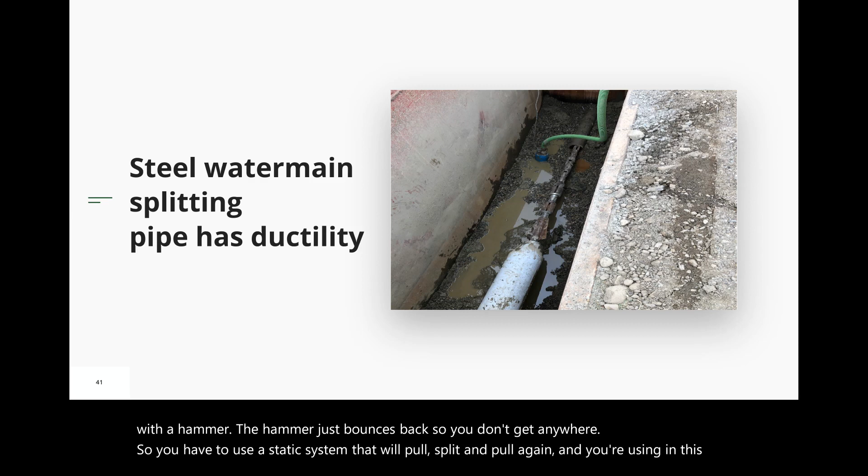Steel pipe has a lot more ductility and ability to spring back, because you're not taking the pipe up to its plastic limits - you're still within its elastic limits, so it tends to spring back. In ductile pipe, it's generally recommended that you do not go more than one size up, because it will tend to spring back and gouge the new pipe you're putting in.

Here is your typical replacement of a clay pipe in the city of New Westminster. The pipe, of course, has no ductility in it - it just breaks and moves into the surrounding ground, and you're pulling in the brand new high-density polyethylene pipe.

Here was a job completed in the city of Maple Ridge a number of years ago, 2017-18. We burst a 375 pipe to a 950 pipe - that was a major upsize, 6.5 times increase in diameter. There's a lot of detail and information on that slide actually.

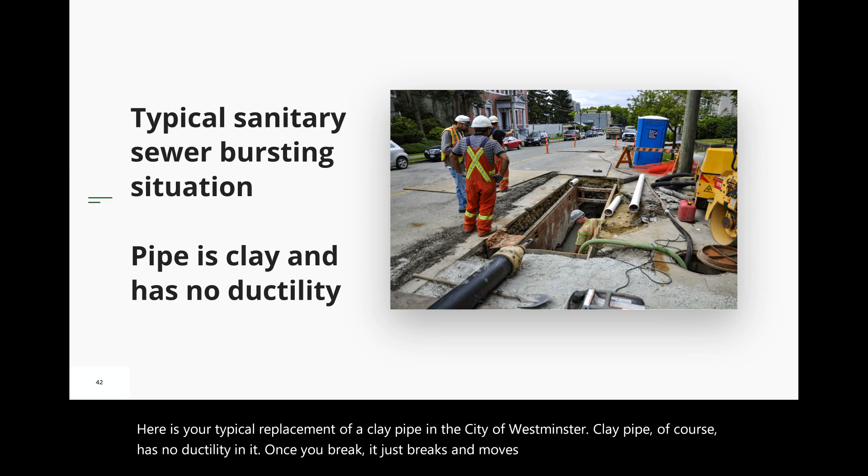On the bottom right here, you've got that hole in the black pipe. That's the bentonite going out to provide lubrication between the new hose pipe we're putting in and the surrounding ground. You can again see the difference in the head between the steel head and the pipe - you can see that 25-30 millimeter gap.

That gap - the steel pipe is making the hole, and you've got that annulus between the hole you've made in the ground and the product pipe you're bringing in. It's the same type of event whether it be micro-tunneling, pipe jacking, or directional drilling. You're making a hole slightly bigger than the pipe you want to introduce. In directional drilling you make it 50% bigger, but in other processes you're only making it 25, 30, or 50 millimeters bigger. That just decreases the friction to allow you to get the black pipe into place before the ground relaxes back around it and secures it in place.

As I move along the bursting head, I don't want to get into the soils issue too much, but at the very front end, next to the joint and the plastic pipes, you'll see a little machine in there. It looks like pizza cutters - little cutting wheels that cut apart the plastic pipe and push it out of the way, cut it, split it, and move it out of the way.

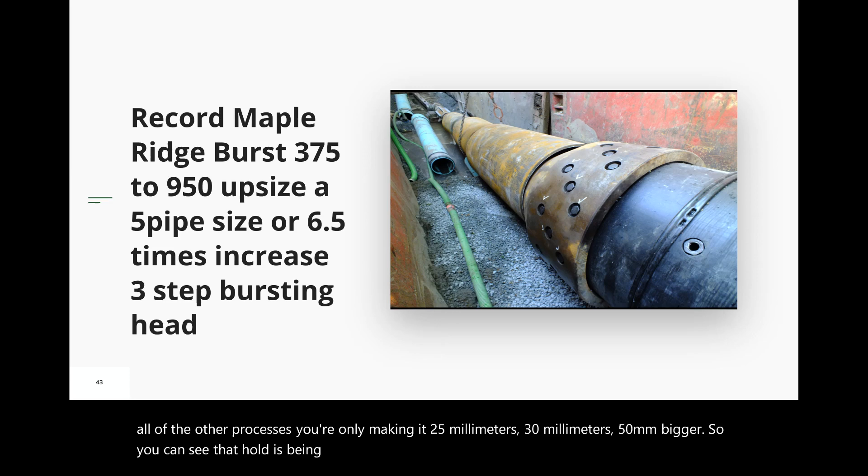The reason there are straight sections in this has to do with the type of ground we were in. We were in very sandy soils, so we were moving the ground out of the way. Once you push sandy material away or put compression on it, you tend to cause the water to leave the sand, and when the material gets dry, friction goes up. Then you want it to relax a little so the water comes back in, friction goes down, and you can start to move again. That was the process being used there.

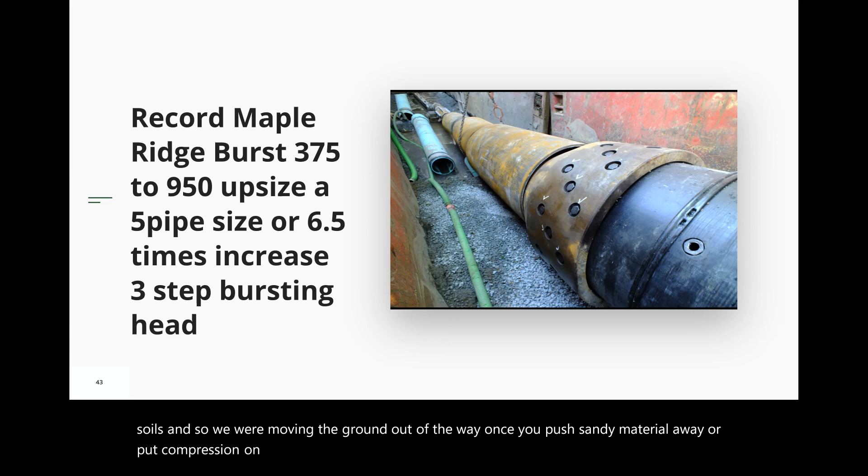Here, pipe bursting was used to replace a 450 millimeter concrete pipe with an 800 millimeter pipe under a road. This was a job in North Vancouver where we were replacing corrugated steel pipe that had failed, introducing high-density polyethylene pipe. This was an area where the ground was actually polluted, so we did not want to dig there. Also, the corrugated steel was full of material.

Here we're just doing house connections, replacing them using pipe bursting - very, very effective, much more cost-effective than open cutting.

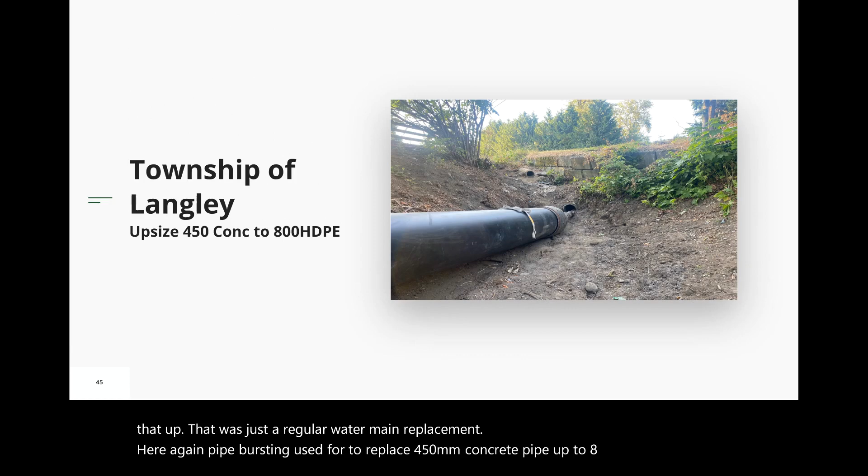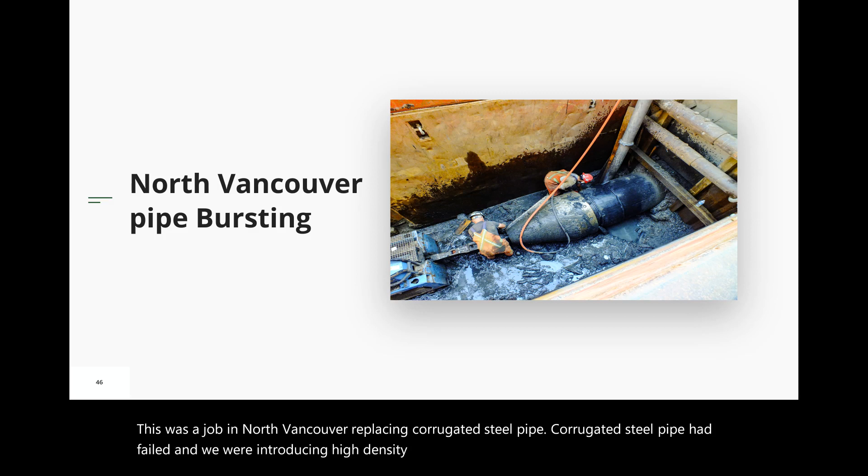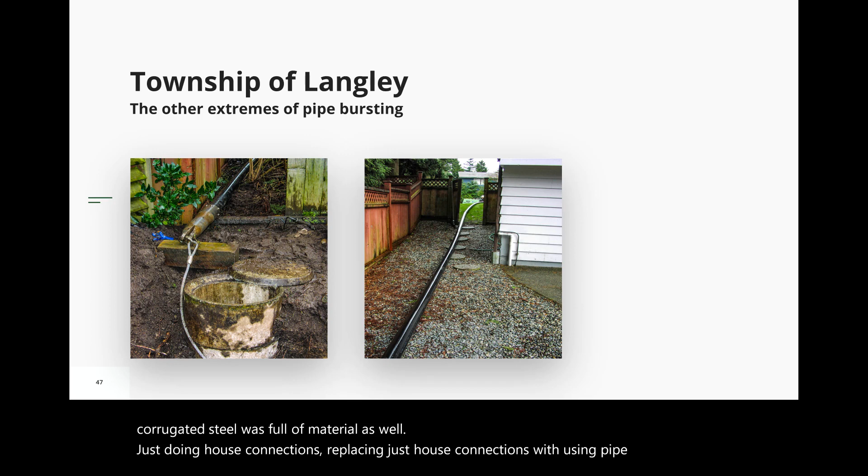Here's typical pipe bursting. Because we're using trenchless technologies, we're either not digging at all or digging very limited excavations. If I was using directional drilling, it would be similar to these excavations. We're reducing our excavation by 92%. So we haven't put a continuous trench through this alleyway. If we had, the asphalt would have probably degraded in 15-20 years and we'd have to replace it. Because we're doing this instead, we're not breaking down our asphalt, and it'll last 40, 50, 70 years. We're reducing the amount of material coming out, reducing degradation of the asphalt, and not putting as much particulate in the air to replace the sewer line. So there are lots of benefits of using trenchless technologies.

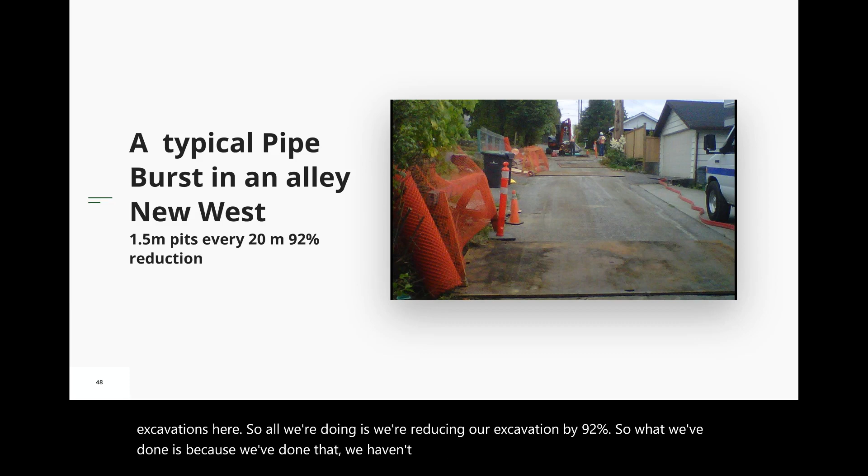On cost comparisons - one concept that comes up is people saying they don't want to use trenchless technologies because it's much more expensive. But there are lots of studies out there that show it's not more expensive.

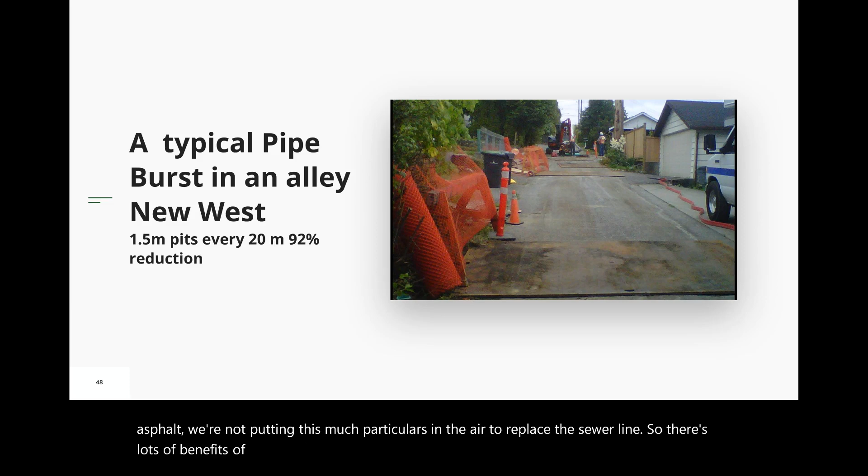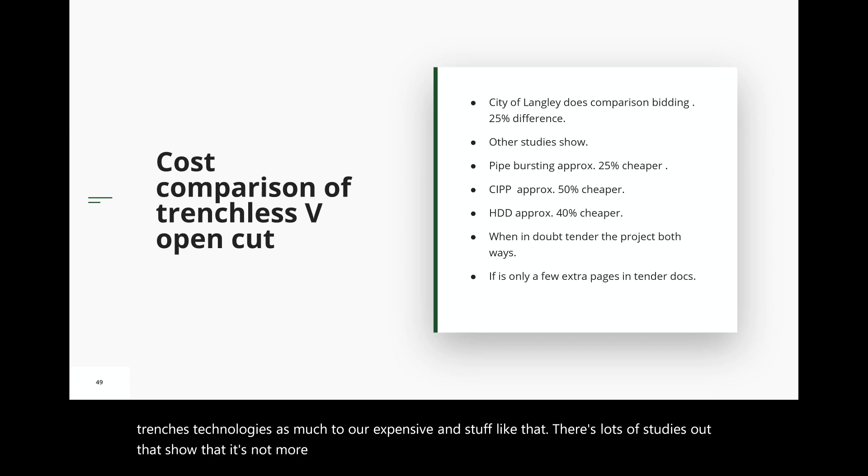The City of Langley, one of the cities comprising the lower mainland of British Columbia, often puts out contracts asking for bids both ways, trenchless and open cut. They generally see about a 25% savings using trenchless technologies in pipe bursting versus open cut. Other studies, not just from British Columbia but from the US and New Zealand, show that pipe bursting is generally about 25% cheaper, CIPP is about half the price of traditional open cut, and horizontal directional drilling is about 40% cheaper. That won't happen in all cases, but we're talking in general terms here.

If in doubt, do that extra 3 or 4 pages and put the contract out both ways - it's not a big deal to do it both ways.